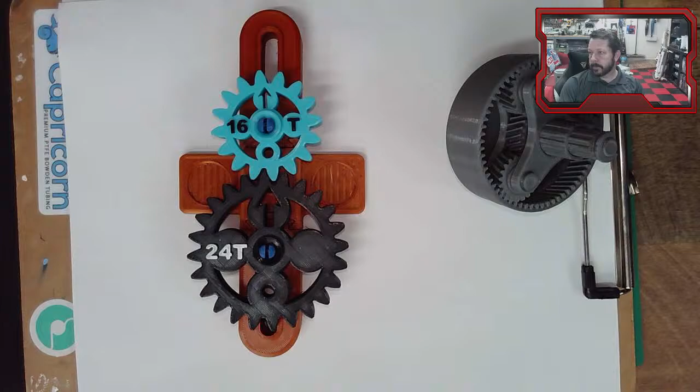All right, I think we are ready. We've got a little bit more on gearing to do. Got some gears here on the screen that we'll look at in a second, just for a minute to describe some things. Let's look at what's left so we have an idea.

We've got today's topic with gear tooth bending stress, but using the Agma method. Last time we did a little introduction to gearing, and we didn't really talk about the gearing failure modes of any sort, so we just talked about the gears in general. Then Wednesday we'll do another Agma.

So Agma, AGMA, that is the American Gear Manufacturers Association. And they have equations that are built on equations that are theoretical, but they've added a lot of factors—temperature factors, velocity factors, and all these overload factors—to try and make them more realistic in the way the gears actually respond to stress. And that's what we're going to do today and Wednesday.

And then on Friday, we'll wrap up, not gears. We'll try and do a few other little topics, mainly friction elements that are in your book. Your book does have a few other things in there. There's a little chapter on kind of a collection of design problems. It goes through a double reduction gearbox design and looks at all the different little pieces that might go in there. So it's interesting. We're not going to go through that one, but it is an interesting kind of comprehensive look at all the machine element components. And then there might be a couple of others.

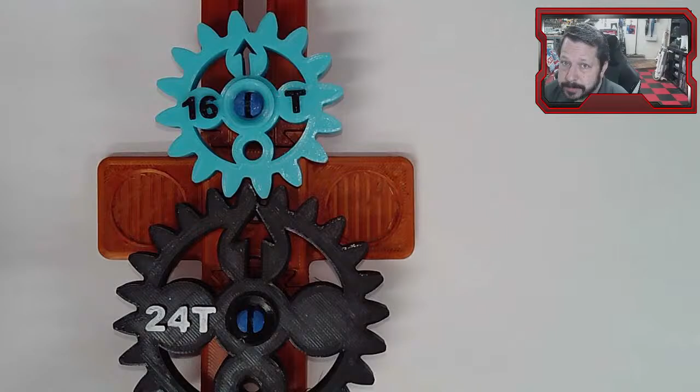So let's get that off the screen, let's look at these guys, if we can zoom in some to them. All right, hopefully we don't need that one. Hopefully you do remember how the gear ratios work. So this one, the blue one, is a 16 tooth and a 24 tooth. So 24 to 16, that ratio is 1.5 to 1. So if I were to turn the larger one, keep it engaged there, one turn, then sure enough, the smaller one has rotated 1.5 turns.

Now the arrows are pointing at each other. And that's one of the main purposes of gears, is that you can achieve these gear ratios. You can achieve similar things with like belts and pulleys. Drums could run against each other. So there are other ways to achieve this ratio. The difference with a gear is that you're pretty much assured that there's no slipping.

The only way that this is going to slip is if the shaft that one of these is on is able to bend enough to where it actually moves out of the way, and then it might just barely engage, and sometimes it slips, sometimes it grabs. But assuming that your gears are well aligned, your teeth don't fail, then you can be pretty sure that you don't have any slipping between the two, the pinion and the gear. So again, in this case, the pinion, we would talk about the smaller gear being the pinion and the larger one being the gear, just to name them.

There are other types of gears. These would be spur gears. So the tooth shape here is an involute shape, and they are spur, straight cut gears, so they're not at an angle anywhere. Chapter 13 goes through several different gear tooth shapes—we're actually in 14 today—but it goes through different gear tooth shapes and even some of the ways that the shape itself is made, like fabricated.

And so this is kind of your standard spur gear. There's nothing particularly fancy about the shape of the tooth except that it is involute. It is not a triangle, there's that little bit of a curve to it there. This is also involute with a little bit of undercut. So you can kind of see these teeth do mate together.

This one being so much smaller, you can see how the tooth profile is a little different. Down in the base, there's this cutout part—that's the undercut. These don't need that undercut because the diameter of the gear is larger.

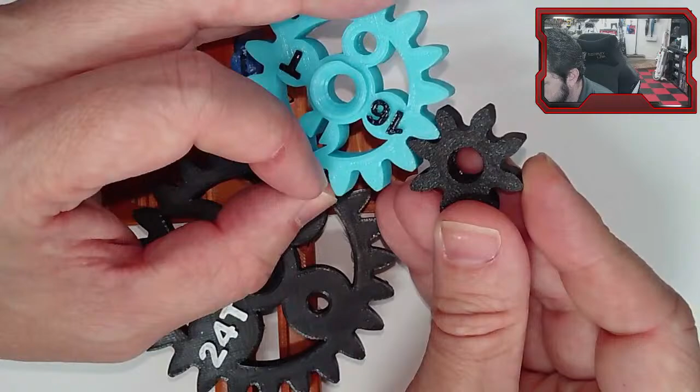But once you get to a certain size, smaller and smaller, you're going to get more undercut so the teeth can actually have a place to be. You can see the blue tooth goes down into that undercut area. Otherwise, there's no clearance for the point of the tooth when they're moving around.

So that's just some of the things we have to worry about. What we're going to calculate today is the bending stress.

As the teeth are turning past one another, there are two forces: one is a tangential force, and one is a radial force. I'm looking at the blue gear, but they both have these forces on them. The tangential force is the one that, as the tooth on the black gear interacts with the tooth on the blue gear, it's pushing past there. That tangential force is the one creating the torque over here.

And the pressure angle—remember we discussed there were three common pressure angles today: 14.5 degrees, 20 degrees, and 25 degrees. That determines the shape of these gear teeth, but it also means the tangential force and the radial force are components, like X and Y components, of that pressure angle.

So with the pressure angle being maybe 20 degrees, you would have the tangential component being the horizontal component of that pressure angle, and the radial component being the Y component of that pressure angle.

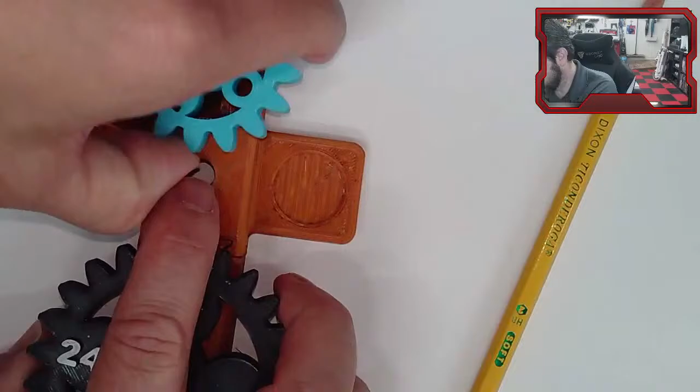Let's take this guy off, and let's see how close we can zoom in to one of these gear teeth. Let's do the ones at the top here with the arrow. I wonder if I can zoom in more. I can—wow, all right, that's as far as I can go.

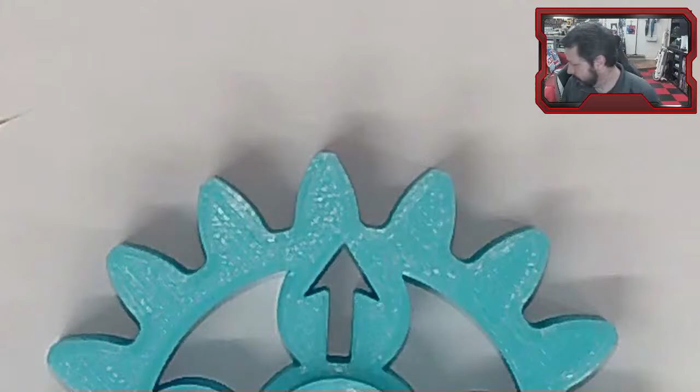All right, so this is the involute profile. What Lewis does—I don't know when the Lewis bending equation was developed, but many years ago—is it treats this tooth like a little tiny cantilever. So instead of having this involute profile shape, it more or less treats it like a rectangle.

So I'm going to try to draw something like this with a rectangle superimposed on it, and then the tangential force—let's use this one. The tangential force from the mating gear, the worst possible place to apply that force would be at the very tip up here, right? Because if I'm thinking of this as a cantilever, the force applied at the very tip would be the worst case scenario for bending stress down at the root of that tooth.

It makes a couple of assumptions. It doesn't even acknowledge the radial force. The radial force pushing this way would actually kind of help make this a stronger gear tooth, right? Because it's going to counteract some of the bending down here at the root of that tooth.

But Lewis ignores the radial component—it only looks at the tangential—and it really only assumes there's one gear tooth in contact at a time. It is possible, like maybe right here, that this guy and some of this one are in contact at the same time. So you can have more than one tooth in contact between a pair of gears.

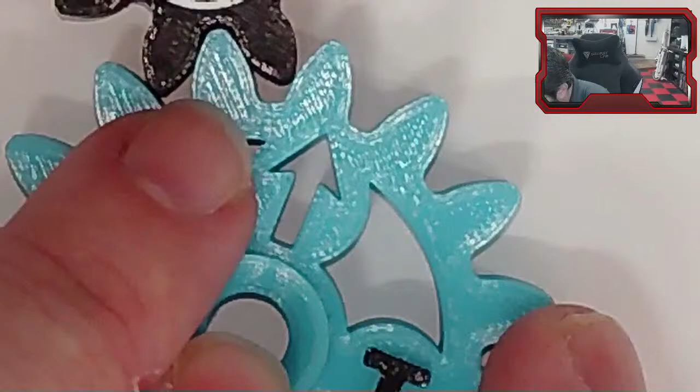All right, let's zoom back out, and put together something like what we're talking about.

So there's our tooth, and the worst case scenario is your book uses a W with a superscript T, I don't remember if it uses a lowercase t. I think it does. Yeah, there it is. That's the tangential force from the mating gear, and it uses that at the tip of this thing.

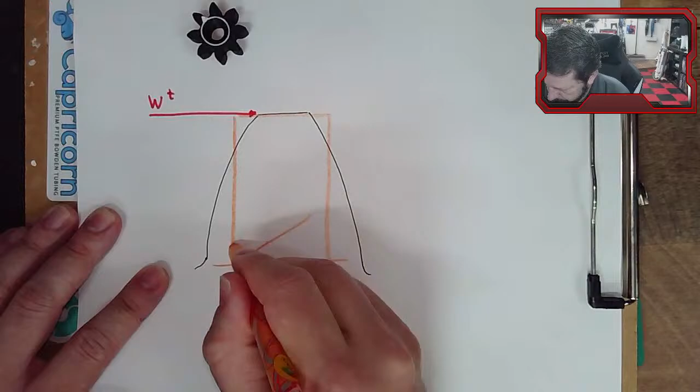Treats this more or less as a cantilevered beam here, something like that. And then it applies - now it might look more familiar if I turn it this way - I've got a cantilever beam with a point load on the end of it.

And that's what it does. It goes in and it basically solves sigma equals m times c over I. So that's a bending equation for a cantilever, or well, for a beam. Doesn't have to necessarily be a cantilever beam, but bending for a beam.

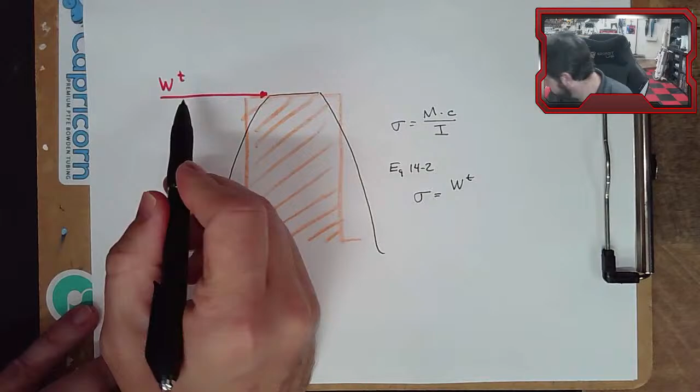And it doesn't use any of these variables. So the actual Lewis equation is, let me get it out of the book, equation 14.2. And it is sigma equals, and then it has WT, so that's the force, and then there is a P over a F and a capital Y.

So we have to go through what these actually mean. So WT is the tangential force, that one's straightforward enough. P, we did talk about that last time, that is the diametral pitch. So let's fill these in.

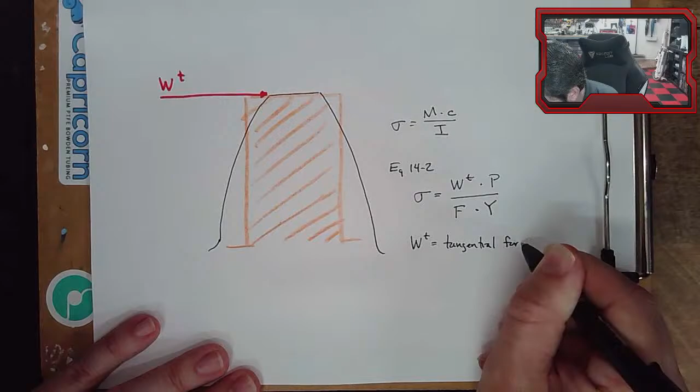WT equals tangential force. P is diametral pitch. So the diametral pitch - that is how many teeth are there per inch of, well, I'm going around this way, that would be circumferential pitch. Diametral pitch would be how many teeth are there per inch of diameter. That's where the diametral part comes in.

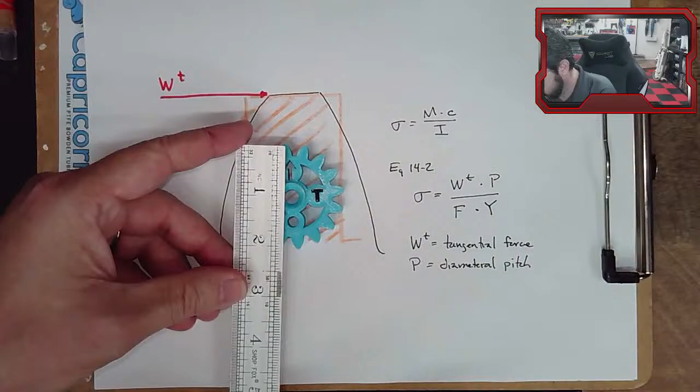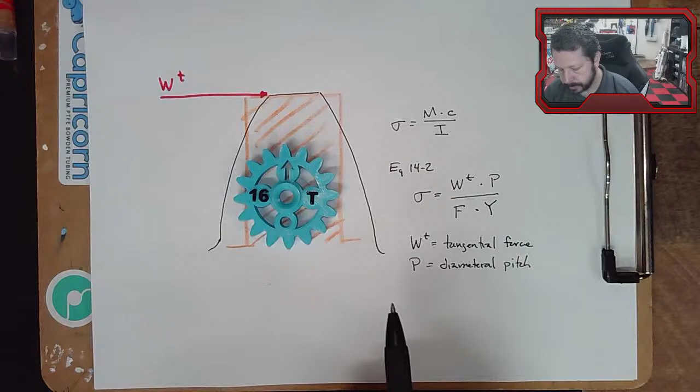So in this case, I don't know what the diametral pitch is, but the diameter of this thing is, I don't have a ruler, something like somewhere around 2 inches. I don't know exactly - the diametral pitch is not to the tip, it's kind of that contact point for the pressure angle. It's somewhere around 2 inches of diameter, and then we've got 16 teeth. So I have 16 teeth per 2 inches of diameter, so I'd have 8 teeth per 1 inch of diameter. So in this particular gear, I'd have roughly an 8 for diametral pitch.

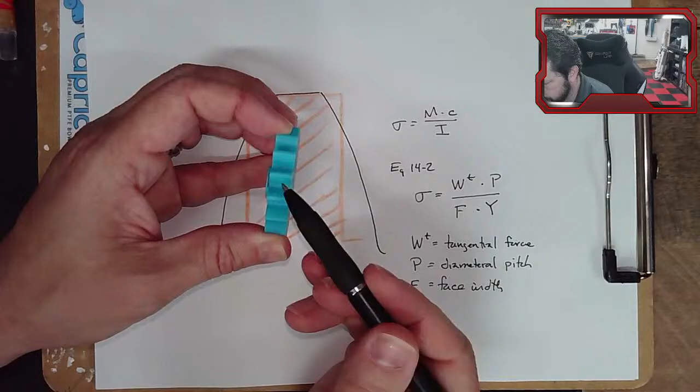F is face width. So that's how much face do I have here that is making contact? If this was a really narrow gear, then obviously the teeth are going to be narrow, and they would be more susceptible to a bending stress failure. And if they're really wide, I've got a really wide tooth over here, then that's going to create less bending stress. And this face width is in the denominator of this equation.

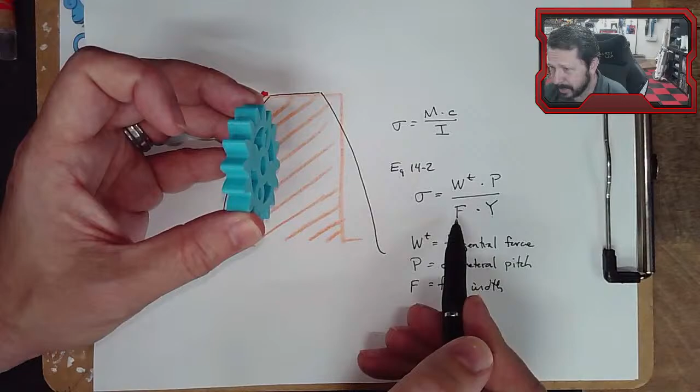Y is something totally different. Y basically takes on the role of C and I in my original bending stress equation - I guess the face width does also. But this is the Lewis form factor.

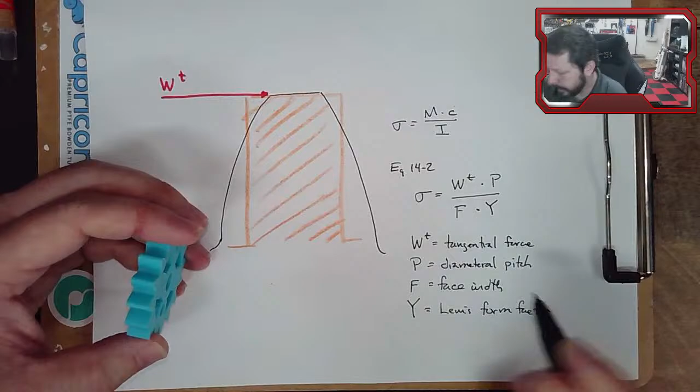And it is - let's see if I can get a chart up here. I opened one up earlier, let's find it again. There? Yeah, so there's a chart in your book. It didn't give me the table 14.2 down at the bottom. And this number of teeth is the Lewis form factor. So if this was a 16-tooth gear, then the Lewis form factor would just be this number, 0.296.

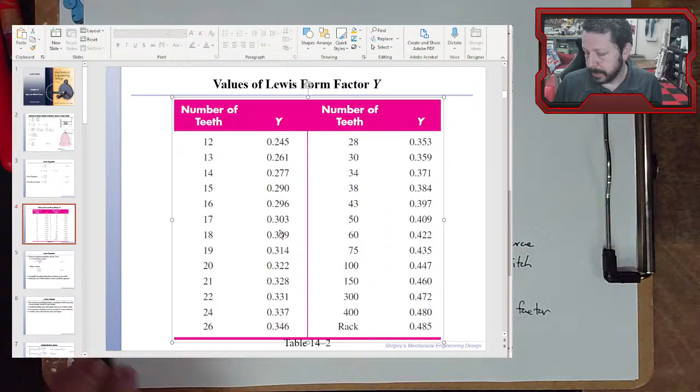There is an equation for Lewis form factor, but there's also this chart. Equation 14.3, I think, is the equation for the Lewis form factor. So what we could do, why don't we go into MathCAD and set up, not these gears, but another set of gears, and run through how we would calculate the bending stress from a Lewis bending stress point of view. So let's get MathCAD open.

Let's see, let's move that out of the way. And I think MathCAD is hiding back here somewhere. There it is. All right, dogs are barking as usual.

Here are our pinion and our gear. They're a little bit fuzzy, but all we need is the picture of them. You might be able to see this little red line on here, that's the pitch line. You might also be able to see these dots, but those aren't really important for anything.

There are labels on here. So the blue gear has 30 teeth, and the gray pinion has 12 teeth. They have a diametral pitch of 6, and a 20-degree pressure angle.

So we'll plug those things in as we need them. Let's put in our equation, the Lewis equation that we're trying to solve. Now your book also adds another kind of modifier to Lewis, which is a velocity factor.

So the faster these gears are spinning, the more load they have to endure, and so there is this velocity factor that can be added. We're not going to add that part to this.

Sigma, this is going to be the bending stress at the root of the gear tooth. Here we're just going to define it.

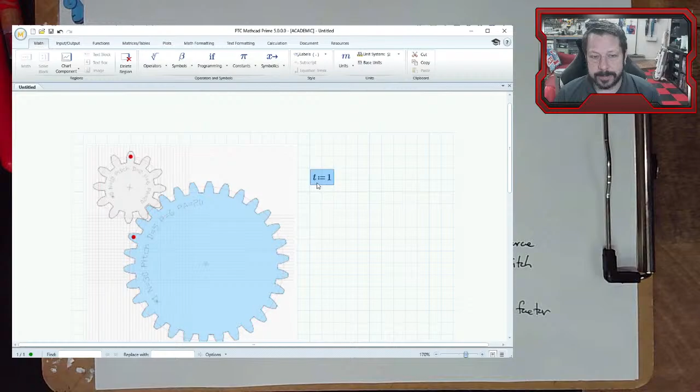W, now I'm having to trick MathCAD, so I've got this T equals 1. That is because the variable that your book uses for that tangential force - I don't even know if you picked up on it, but when I was writing it, the T was actually a superscript, but it's not an exponent, it's just a superscript. So I'm just saying WT, but T is just 1.

So that's how I'm getting MathCAD to agree with me here, that that's not... well, it does think it's an exponent, it's just an exponent of 1. But it's just a superscript in your text. It doesn't mean anything, it's just tangential.

All right, so we have to come up with these values. So the diametral pitch is just written on the gears here, P equals 6, so we can get that one. We'll do the same thing where it's teeth per inch, but teeth aren't actual units, so we'll just make MathCAD think that it's just a 1.

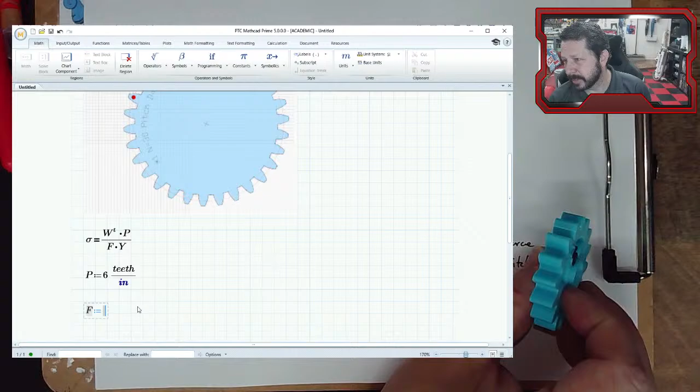Let's see, face width, we can define that. So remember, the face width is how wide are the teeth on the gear. So you might have a hub, kind of see this little area over here that sticks out - that's not the face width. The face width is how wide are the teeth. So I'm going to make these a half inch wide.

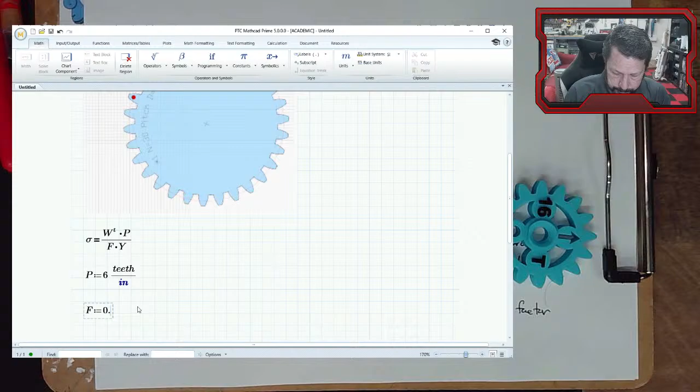So that would just be something you measure, or you know, or you're given, or maybe that's the thing you're solving for. That's one of the easier variables to modify if you come out with a gear that is the right shape - it has the right gear ratios with the gears that it mates with, but it's not strong enough.

This face width is the easiest thing to modify. Just make it thicker - instead of trying to put more teeth in there or run at a different speed or whatever, just make the gear teeth wider, and that will reduce the stress on the tooth. So this is one of your main design variables, and for us, we're just setting it at half an inch.

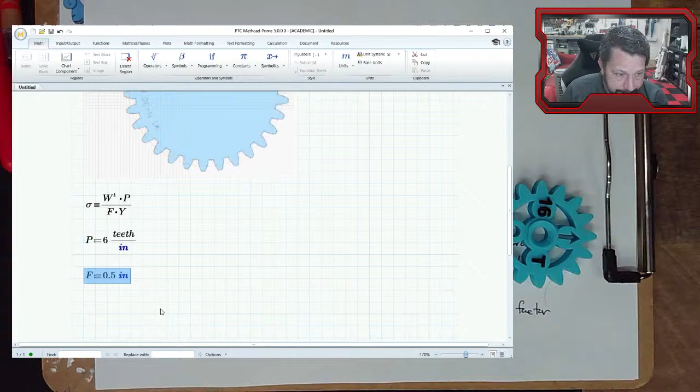Y, that's an easy enough one - that's the Lewis form factor. Now, we do have to decide, are we talking about the pinion or the gear? Most of the time, you're going to be dealing with the pinion, but you could easily also operate on the gear.

Well, let's look at the Lewis form factor for a reason why. So these have teeth of 12 and 30. So that's not it - where'd it go? Oh, I pulled it out of the way. Yeah, it's over here.

12 has a form factor of 0.245. This number is in the denominator of the bending stress equation. So 0.245, the other one was, I think, 30: 0.359. So the larger number of teeth will put a larger number in the denominator of the stress equation, so it will lower the stress. There'll be a lower bending stress on the gear tooth with more teeth on it.

So you're going to be working it with the pinion, the smaller gear. So we're going to put 0.245, just reading it off of here, as our form factor. Actually, let's leave that, we'll keep coming back to that. So let's leave that more or less there. All right, so y equals 0.245 from the table.

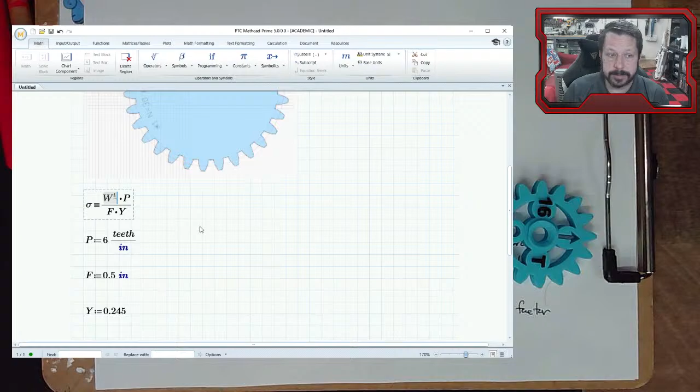So we need the tangential force. I'm going to get this one a different way. We've done this in a couple of different places, maybe even in the shaft lectures, and we've talked about this pressure angle. You just take the horizontal component to get the tangential force. I do have the pressure angle, it's 20 degrees. But we're going to get this one from a different route this time.

So let's figure out how much power we're dealing with, and from that, let's figure out what the tangential force was going to be. That's a little bit different than the way we've done it before, so it's just a different process. So I've got to set up some more given situations.

So let's say the torque on the gear - the gear is the blue one - and I'm going to define this as 125 foot-pounds. So it's given. Let's also say that the omega for the pinion, oops, I didn't get the subscript in there, did I? This is the speed of the pinion, 100 RPM. So those are just given values that we are designing for or that we've set up already.

And now, for the pressure angle, I meant to find out what variable gives me the symbol for pressure angle, and I don't know what it is. I could just go through all of these until I find... oh, that's going to be pi. Oh my goodness, which one? Oh, it's J. All right, or that's going to be closest that I have to what I need. So that's the pressure angle, 20 degrees.

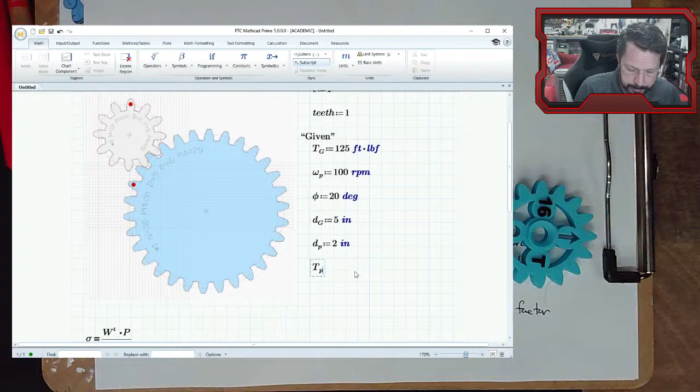Let's calculate the torque on the pinion. So this should be a pretty basic calculation, just using either the diameters, so 5 to 2, or using the number of teeth. I didn't actually put the number of teeth in here, but we could also put those. They are also given. I'm not going to use them, but just for completeness, we can have them in here. So there are 30. We do have our teeth variable set up, so we can put teeth in there.

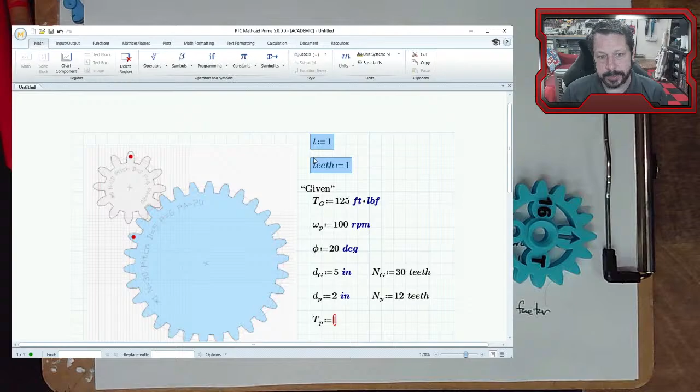And pinion is 12. Remember, you can't use teeth as a unit unless you do something like this earlier where you just set it equal to 1. All right, torque on the pinion is the ratio of the diameter of the pinion to the diameter of the gear times the torque of the gear. And it came out in joules, so let's put it in foot-pounds since that's what our other stuff is in. 50. And, you know, we could have sorted this out ourselves just with algebra.

We could also do a similar thing with the speed. Omega of the gear, we have omega of the pinion. So omega of the gear would equal the diameter of the pinion over the diameter of the gear times the omega of the pinion. Oh, I just typed W, I didn't do the... there we go. I don't like the way the subscripts work in this version of MathCAD. Let's put it in RPM though.

40 RPM. So now we can calculate the power of either of these. They'd be the same number. But if you remember, in general, power equals torque.

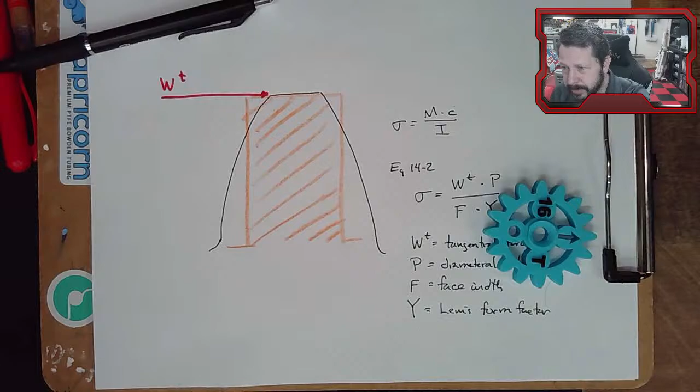We're going to put that tangential force at the very peak of the gear tooth and calculate the bending stress using the Lewis equation. So let's actually just copy this equation, paste it, change that to an evaluation, or well, a definition, and then evaluate it.

Get some weird units here. Let's see if we can get KSI out of this, without that. Why is it? Oh, because I've got the WT part in there. Let's change this to be the superscript T. Get rid of that. There we go.

5 KSI. Now this could be modified more, like I said, with the velocity factor - there's a KV that can bump this up based on how fast we're spinning the gears, and a couple other factors like what shape the gears and gear teeth are. But still, it's not going to multiply multiple times, it's going to be a factor of 1 point something. So you could be pretty sure that 5 KSI for most any kind of metal you're going to make a gear from is plenty of factor of safety against bending stress.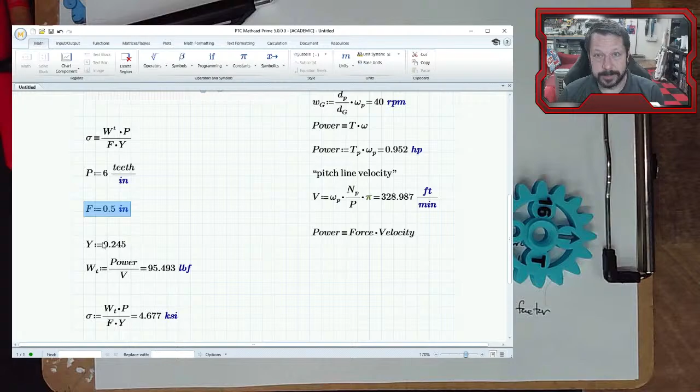So Lewis doesn't give you an accurate number, but it does give you a 'are you close' number. For instance, if this number had come out to be 46.7 KSI, now you're getting a little bit close to yielding stress numbers, and given that this Lewis equation isn't particularly accurate, you'd have to wonder. If it came out to 467 KSI, then you know there's no way you're going to get that kind of strength out of a metal gear. So I would know I have to redesign something, and usually that means redesigning the face width - it's the simplest one. But 4.6, you're pretty sure that's not going to fail any kind of metal gear.

But if you want to know more accurately, that's when you go to AGMA. I think we certainly have time to start AGMA. We may not get all the way through it, it's a pretty lengthy process, but let's go over to AGMA.

AGMA, again, is the American Gear Manufacturers Association. Wow, I misspelled that. There we go. So it's AGMA.

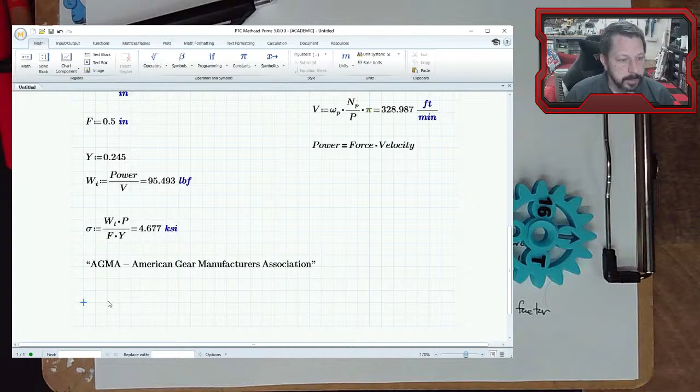And what AGMA does is it takes this equation, basically, and adds a lot of multipliers. It's similar to when you do the modified endurance limit - you take a base number and then modify that number based on all these conditions that might occur. AGMA does the same type of thing. It's going to give us a stress number, like this one, but it's a totally different number, and it's not an actual stress that you could compare to a strength you would look up in a book.

So what you do is you calculate the AGMA bending stress and you compare it to the AGMA bending strength. So you actually have to calculate AGMA two times for the bending failure. Once to calculate the stress, and then again to calculate the strength for that gear.

There's a whole other type of failure that AGMA looks at that we haven't talked about yet. We'll do that on Wednesday, but the contact point between the gear teeth cycles over and over, so there's a contact stress that has to be calculated. It works the same way, where you calculate the AGMA contact stress and compare it to the AGMA contact strength. We're definitely not going to get to that today.

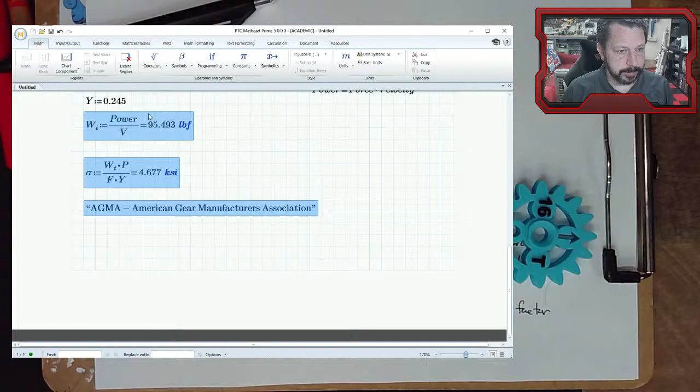But we should be able to get through the AGMA bending stress. All right, let's get our equation written down. Let's start a new page. In fact, let's get this guy on another page too. All right, let's start down here.

So AGMA, now your book just uses sigma, but I'm going to put a subscript AGMA on it, if I can type a subscript AGMA. There we go. Just because it's not a sigma stress that you've been using, it really is specific to AGMA.

All right, so W, again I will use the superscript here, but only because I'm in the symbolic equation. So there's the tangential force. That number we already have. That's the exact same number we just used here. So that's the same.

WT times KO, that's going to be an overload factor that we can look up. KV...

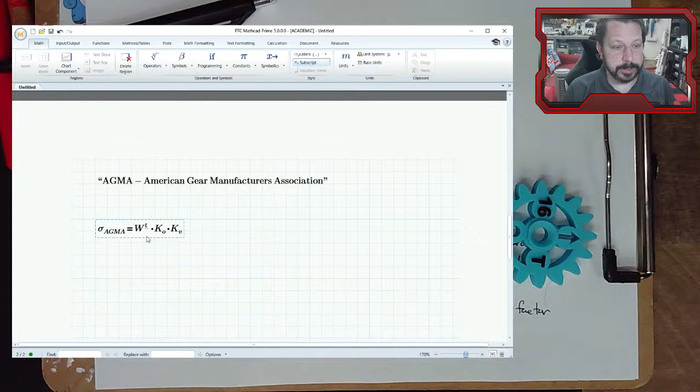...is a dynamic factor. Now this KV, a similar one does exist for Lewis, so that part of Lewis can be modified to make this number a little more accurate by multiplying by KV. That's talking about how fast the gears are spinning and how well they're made. The quality of them would affect that.

KS, this one is a size factor sort of thing. It's optional. The way AGMA is set up, it kind of future proofs itself so that they know there's an effect, they just haven't sorted out the exact numbers to put for that effect. So some of these are going to be optional, and we're just going to fill in a 1 because we don't know.

Now, I've got the 10th edition of this book, which was printed several years ago, and I didn't go check the current AGMA setup. If you go to the American Gear Manufacturers Association, you will find the most recent data on some of these factors. So there could be more guidance currently, depending on when you're trying to solve this AGMA equation, and you would need to go directly to the American Gear Manufacturers Association to get those numbers and those charts.

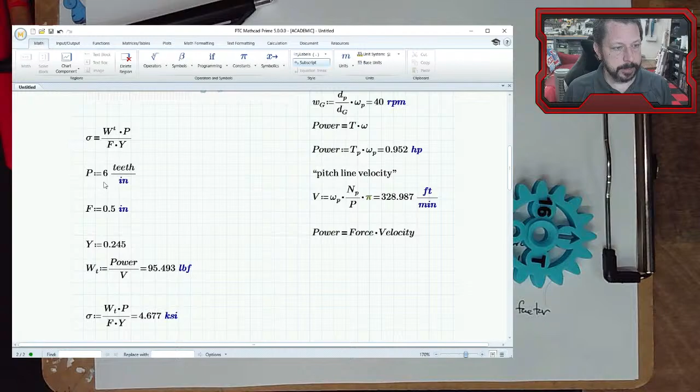Multiply times P. Now they use a P sub D. We just use P up here. It's the same thing, that is the diametral pitch. They just specify that it is diametral with the subscript D.

That number is over F, which is the face width. We have that already, we used 1/2 inch. Km, Km is a load distribution factor. It's actually going to take us a long time to calculate that one. We'll get to it in a minute.

KB, not KB like we used with the springs, the Bergstrasser. It's a different KB. What is it called? It is the rim thickness factor. So that's a relatively easy one to deal with. We'll deal with it in a minute, at the end anyway.

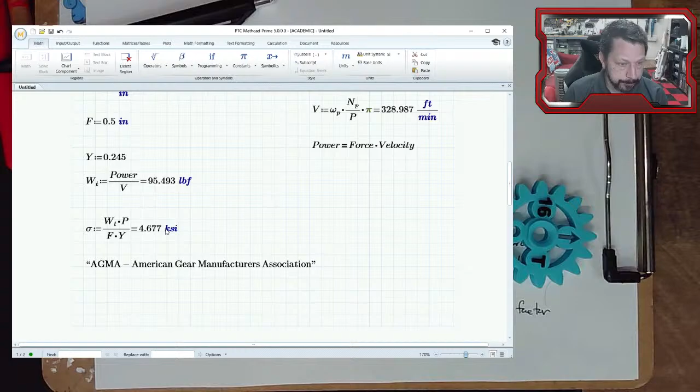Over J, J is similar. It is a geometry form factor, so it's similar to the Lewis form factor. It's not the same number at all, but it's kind of the same thing. All right, so some of these we have, the others we need to go and figure out.

All right, so first of all, K overload. Let's see if I can find the little chart for overload. Well, we can go through some of these equations while we are looking. There's that KV applied to the Lewis form factor.

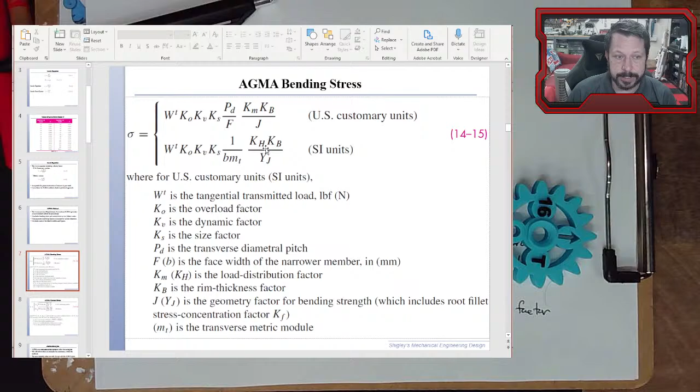There's the AGMA bending stress. Now, notice I am using US units. They do have a separate equation if you're using SI units, and you'll notice that some of these variables are slightly different. Like instead of J, they have Y sub J, so that when you grab the number out of a chart or a graph, it has the right units in it. So if you are using SI units, then you need to be over in this version of the equation versus the US unit version.

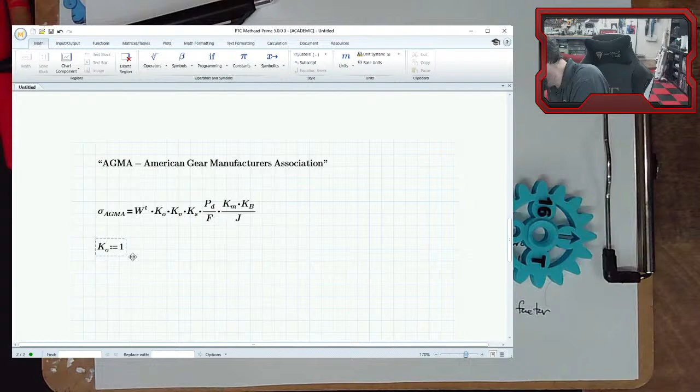Yeah, so here's what your book... I don't know how you're supposed to know these numbers otherwise, though. Oh, see, figure 14.7. Okay, that's the elastic coefficient. Yeah, I don't see, that doesn't actually help me.

But it is on page 750 that it mentions the overload factor, and it gives a reference for where you can go look up numbers like I showed you on the screen. But since we don't have any indication that this has an overload situation, heavy shock or medium shock, we're going to go with K naught equal to 1.

KV is the next one. So now we've got WT, we've got overload, let's do the dynamic factor. Maybe we can label these so that we don't forget. This next one will be the dynamic factor.

All right, so dynamic factor is KV. It is not quite as simple. Let's go find it in our chart here. Here it is, there are two equations again. There's that feet per minute that we had as oddball units before for the velocity. That's because in this equation, V is expected to be in feet per minute. If you're using the SI version, it has two different versions, velocity is in meters per second.

So how this one works is you have these A and B parameters, where B is based on QV. QV is a quality value. Also, there is a chart where you can just look up the dynamic factor off a chart with different traces on it. We're going to use the equation though.

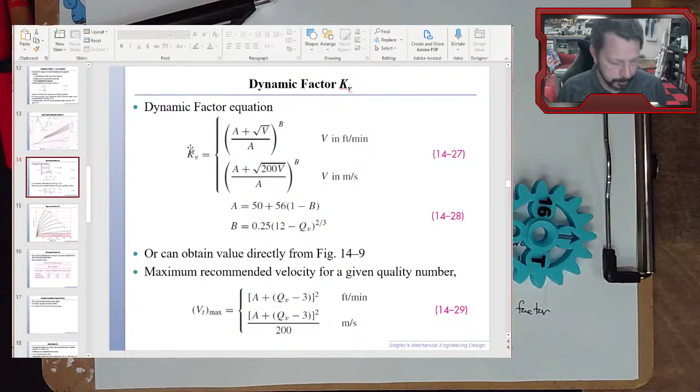So the first one is actually QV, which is 5 for us, and we just decided that's the lowest quality rating we could pick. All right, B, based on that, is 0.25 times 12 minus your QV, and that 12 minus QV term is raised to the 2/3 power.

That gives us a value for B of 0.915. You use that value to calculate A, 50 plus 56 times 1 minus B. That gives us... that doesn't give us that. Oh yeah, it does, 54.77. All right, now I take A and B, plug them into the correct version of KV.

Let's see if we can get this one right. It's going to give me an error, but we'll fix it in a minute. Plus the square root of V, which has to be in feet per minute, over A, all of that raised to the B. Now it's going to give me an error that says it can't be calculated.

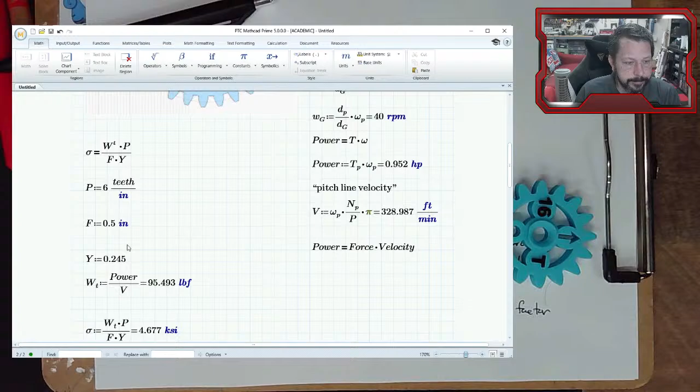That's because this is a MathCAD thing. The V is feet per minute somewhere, or it's a velocity, so it has units of velocity. A and B do not have units at all, so it can't add a unitless thing to something that has units. So I'm going to divide by feet per minute here instead of something like inches per second, because that's the unit this equation expects velocity to be in.

So now it'll solve it, and I get 1.3 for kV. So we have our dynamic factor. Ks, this one is the size factor, and it's optional, and we are just going to put 1.

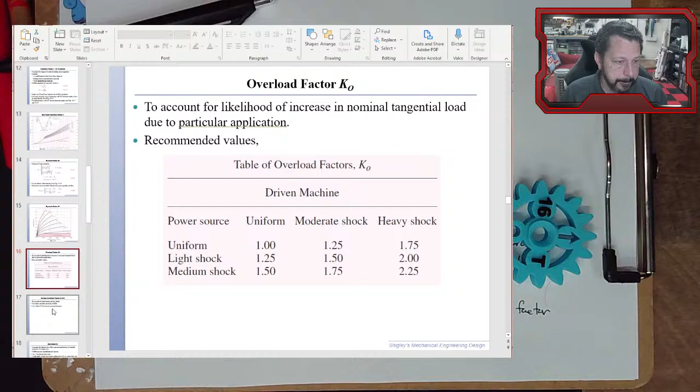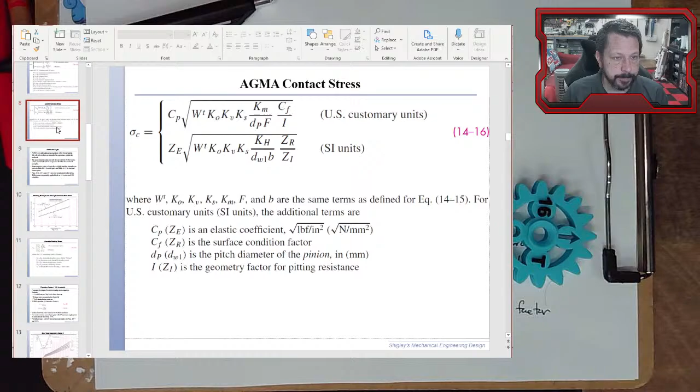Let's see if I have a chart pulled up about Ks. I don't even think I do. Surface, KV, J... yeah, I don't have one for Ks pulled up. So it is an optional size factor, one of the ones that's kind of future-proofing the equation. Once there's more data, there would be a better way to calculate or put a number in for the size factor. This is trying to take into account fatigue, kind of like the size factor for a shaft, where if there's more material, there's more chance of an error in the material. But there's no data currently, at least in the 10th edition book, to put a different number in here. So we're going to put 1.

Now we got that one. We already have our... we don't have a PD variable, so let's do that. It is just what we called P, the diametral pitch. So we took care of that. We already have a face width.

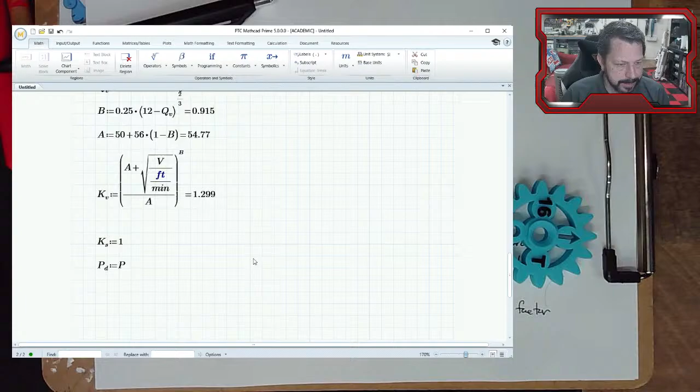So Km, this one's actually a lengthy one. Let's do it. Let's see if I have a picture of that. Hey, there was a Ks. So there is an equation you can use for Ks, where you're basically taking the method from chapter 6, finding the KB and doing the reciprocal of it. So you could apparently use that process, but we're just going to stick with 1.

Load distribution factor, I'm looking for it, here it is. So Km is all of this. To calculate Km, I need all of these other little pieces over here. First, let's put our Km equation in MathCAD symbolically: Km equals 1 plus CMC times CPF times CPM plus CMA times CE.

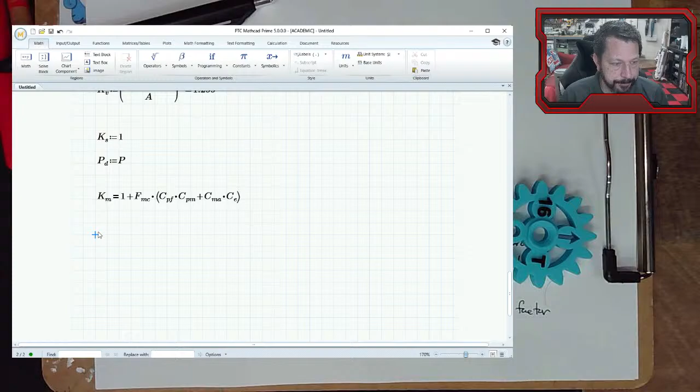All right, so we got to get all of these things sorted out. So let's go back over to this. So CMC, the first one of these, we have two options, 1 or 0.8, and it's talking about crowned versus uncrowned teeth.

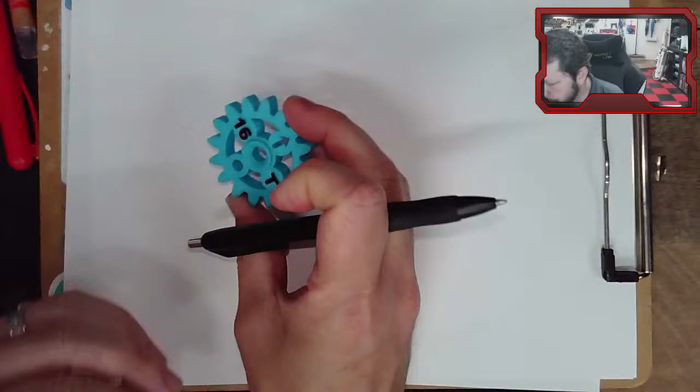What this means is, we'll have to draw a picture. So we have uncrowned teeth. Let's get a blank page. If we had a gear tooth here, I'm going to draw the gear teeth as a rectangle just to make the crowned part easier to draw. So there's our gear tooth, kind of like that rectangle, and it has some face width into the page. There's a fillet down here. So that's uncrowned.

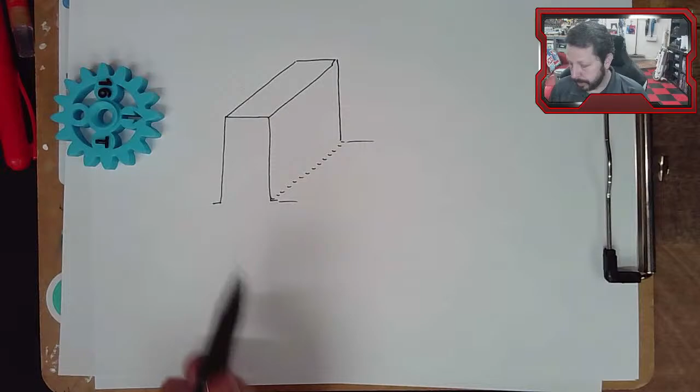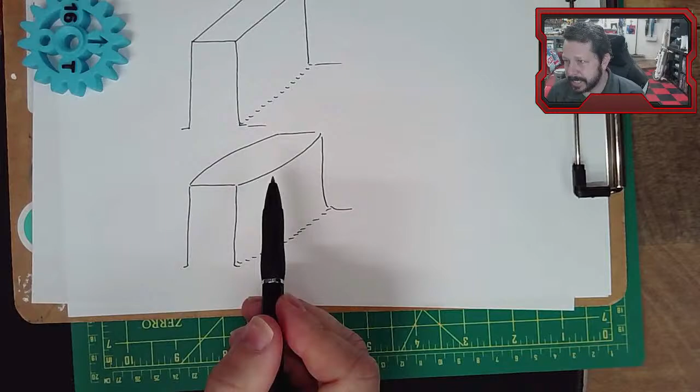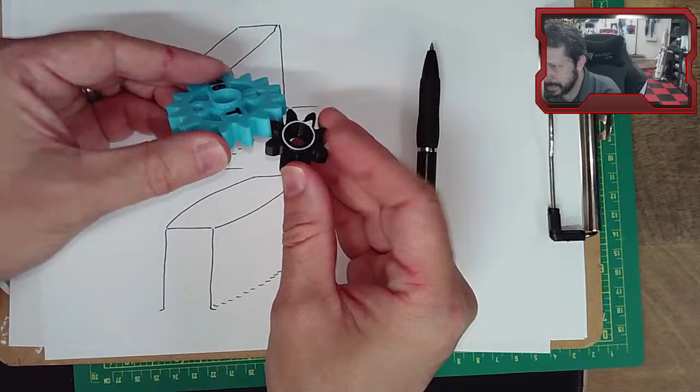So crowned is like this. Hopefully you can see I didn't just accidentally draw this line curved—that's the crown. The idea is that instead of a perfectly flat surface on the face for the gear or pinion to mate with, I have a little bit of a crown so that if I'm a little bit crooked on mating these things, I still have good contact between the two gear teeth. So I can have a little bit of misalignment, not as much as I'm showing here, I'm just exaggerating it. Not as much as this twisting, but you can have some of that twisting and still get good contact.

Where if these were perfectly flat and I twist them, there's going to be a single point of contact. So crowned gears have a better ability to handle misalignment, but they're harder to make because now each of these teeth has to be crowned, so somehow you have to get that crown made on the surface of the tooth. You can't just broach across it to create the teeth. So that's crowned versus this, which is uncrowned.

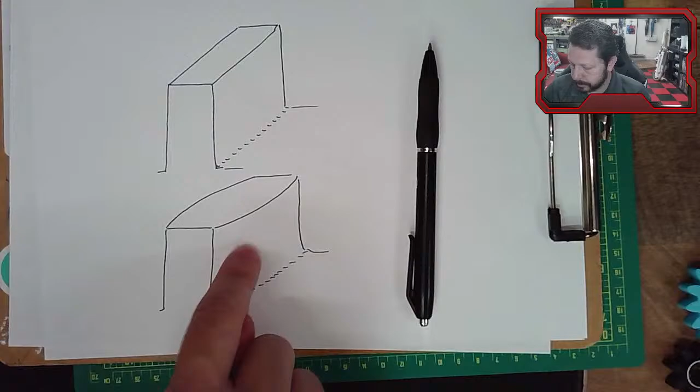Since we have the quality 5 gears, I'm going to assume that we have uncrowned teeth, because you wouldn't go and crown the really cheap gears. So that gives us a CMC of 1.

The next one is PF - I don't actually know what the subscripts stand for, whether MC stands for crowned or uncrowned. So PF is the next one in our list. We have our face width, which we have built in, and D, which is the diameter of the pinion or the gear. We're talking about the pinion in our case, so it'll be D sub P, the diameter of the pinion. Our face width is less than 1 inch, so we need this first equation.

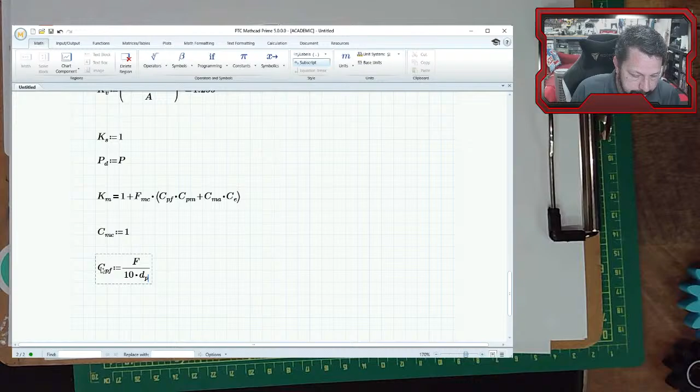So CPF is F, face width, over 10 times the diameter of the pinion, that quantity minus 0.025. Now we essentially get 0 - some number times 10 to the negative 18th, so we pretty much get 0. If we put a 0 in here, this whole thing just becomes 1. Well, no, because this part becomes 0 plus whatever that is, so who knows.

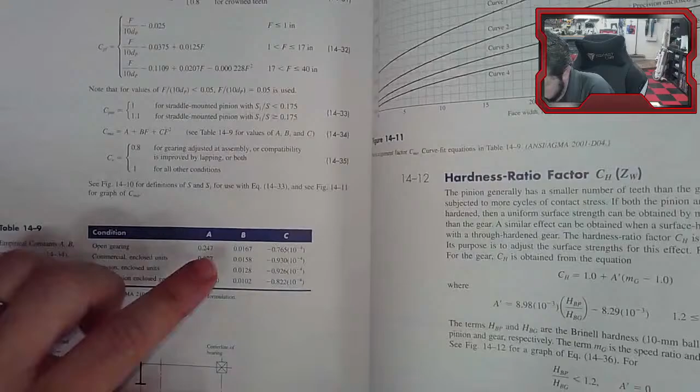But it does give us a note - in your book it's given, in this chart I have it doesn't actually give it, but let's find it. Here's the equation we're using, and down here it says note that for values of F over D, diameter of the pinion, less than 0.05, just make that whole term 0.05. So we're going to do that.

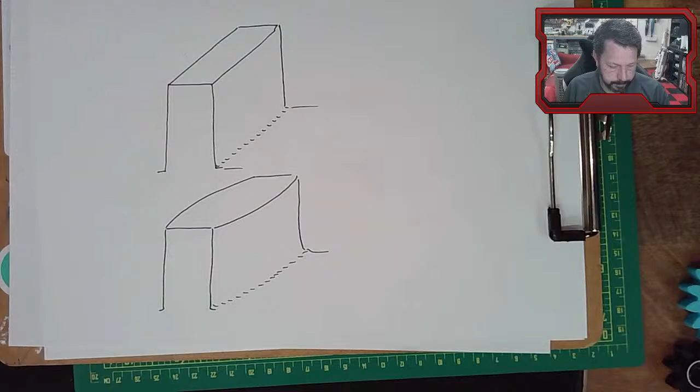So let's copy this thing, and let's make this term here 0.05. And now we get 0.025 for PF.

All right, PM - well, I don't have a picture for PM. There it is, it's on the next page. So this is how the gear is mounted onto a shaft and the shaft supported. I've got this picture here. Many times with gears, not 100% of the time but most of the time, the gear is mounted between two bearings somewhere, and PM is whether it's straddle mounted, and on which side of the center it is.

So this is the center line of the gear - there's one bearing, there's the other bearing, the shaft is through the middle, there's the center. For a straddle mounted pinion, which we're dealing with, S1 over S - S1 is the offset of mount and S is the total span - less than 0.175 gives us 1, and 1.1 if this ratio is basically how far off center it is. So if it's close to center, we use 1. If the gear is kind of off to one side of the center of this span between the two supporting bearings, then we use 1.1.

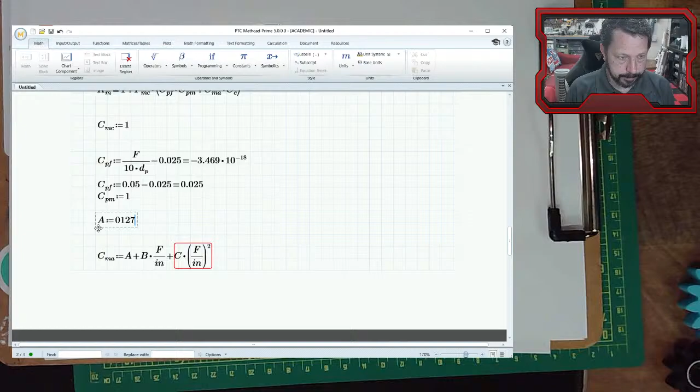Let's see if we can put them in right here. A from our chart is 0.127. B is 0.0158. And C is negative 0.930 times 10 to the negative 4th. And now we have a CMA number, 0.135. I think we're almost done.

We need CE. Yeah, I saw it in here. There it is. So we can either have 0.8 for gearing that's adjusted at assembly - basically, how well aligned are your pinion and gear - or 1 for all other conditions. 0.8 if you've done a lot of careful alignment. We have not done careful alignment with our gear setup, so we're just going to do 1.

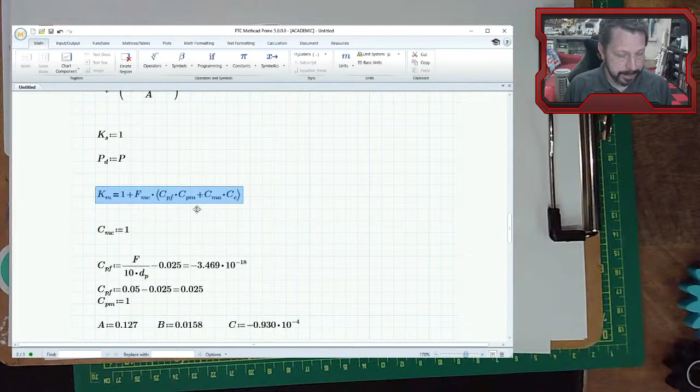So for that one we can just go down here and CE equals 1. We have all of these now, and we can set this equal.

Oh, I don't have FMC. But let me check, let me make sure. Oh, because I typed it wrong - that should be CMC. I didn't know what that variable was, I'm messing up my whole equation. It's 1 plus CMC. There we go, and it comes out to 1.16.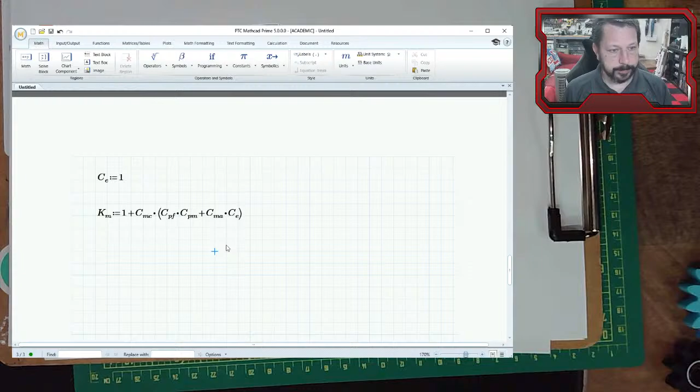All of that to get this extra 16% in there. Alright, now, do we have them all? No, we don't have KB or J. We have time to get those, though.

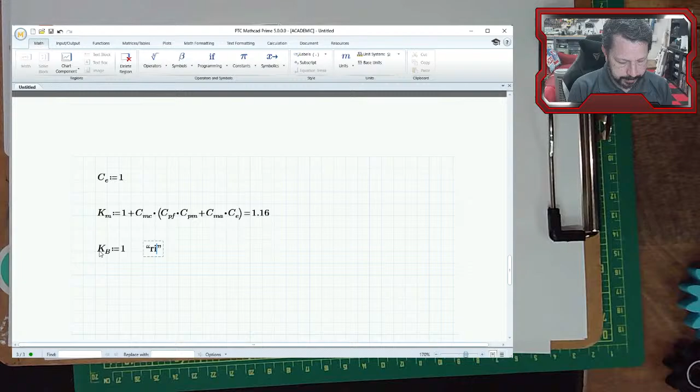So KB is going to be 1, so I'll go ahead and put it in. This is the rim thickness. Let's see if we can find it - here it is, way over here. So the rim thickness - first your gear has to have, you have to know if it has a rim or if it's a solid gear. The ones that I've been using, these do have a rim.

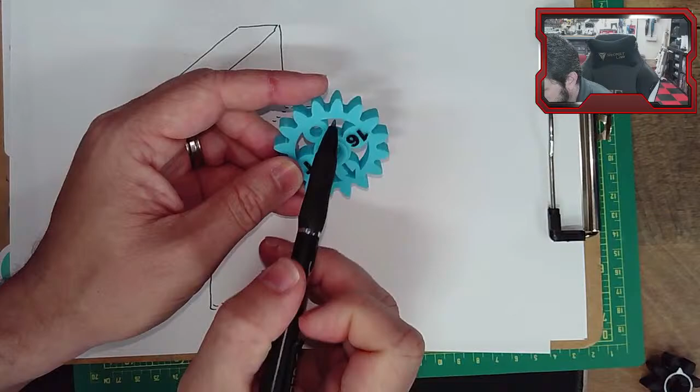They have a weird set of spokes inside here, but it's not solid. It's not a solid filled-in blank like you just took a flat sheet of metal and cut the gear teeth into it. So this one does have a rim, and you can see the rim is right here. So if this rim thickness is different - there's holes in here, there's spokes in here, or maybe it's just inset and not as thick, solid but thinner in this area and thicker out here - that means it has a rim.

And then you go figure out what this rim thickness ratio is with this equation. Our gears are not this style - we're just using flat gear blanks with teeth on them. So there's no hub really, no spokes, no inset center part, nothing like that. So we just use the value of 1.

But they have a chart and an equation. When this ratio of rim to thickness is less than 1.2, then you could have some factor here that gives you a larger rim thickness ratio. We're just going to use 1 in our case. And then that leaves us with our geometry factor.

So that one is - no, that's Y. Where's the picture for it? It's way up here, actually - spur gear geometry factor. Alright, so this is a chart for spur gears. I don't think there's an equation - well, there is an equation for converting it, but there's also this chart. In this case, we're going to use the chart. So what you have is on the x-axis, the number of teeth for which geometry factor is desired. Ours is 12 - the pinion had 12 teeth.

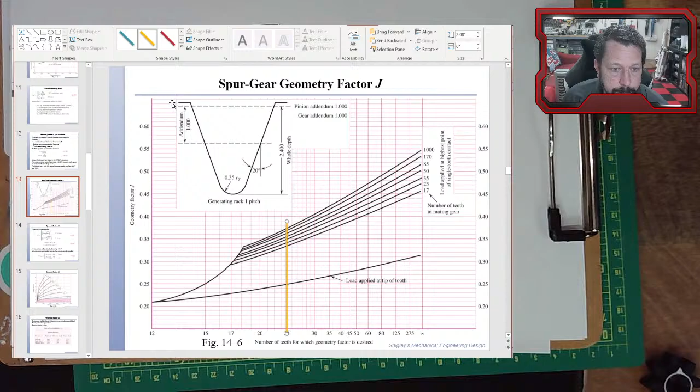So I don't have to do anything other than get this 0.21 number as our J value. But let's just momentarily pretend we have different numbers on our pinion and our gear. Let's say our pinion is 24, so we're on this line right here now. Let's say, in fact, I probably can draw a line there. So there's 24, let's make that a big yellow line. So there's our pinion teeth. And let's say that we have 35 on our gear.

We have two options at that point. We have the option here, down here, where we're taking the most conservative approach where the load is applied at the tip - that's kind of what we did with the Lewis equation. So we could take this option, and it doesn't matter how many teeth are on the gear, just how many are on the pinion, and we get a 0.25 as our geometry factor.

Or we can say, well, a little more realistic and less conservative would be we actually go and find the number of teeth on the gear. Let's say it's 35, and we intersect these lines, which end up right here, which is going to give us a 0.355, I would say, for our geometry factor.

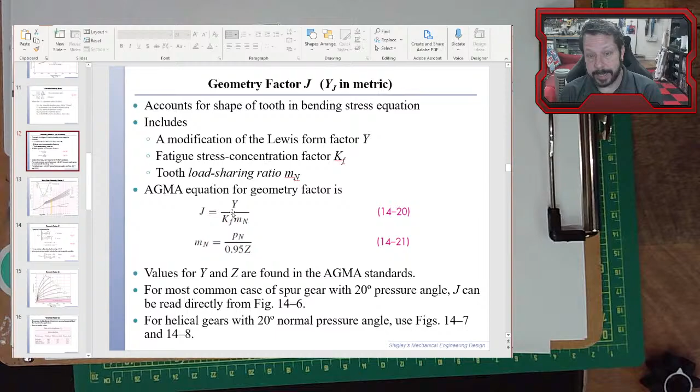So that's how you can use this. Like I said, there is an equation, you can actually calculate it if you want to. But this is simpler because you have the different options of do you want to do the worst case scenario, do you want to break it out to which one of these gear teeth numbers are you dealing with, or whatever. In our case, we're actually over here at 12, so our line is over here, and it just intersects with all the numbers of mating teeth at 0.21. So that's for J, J equals 0.21.

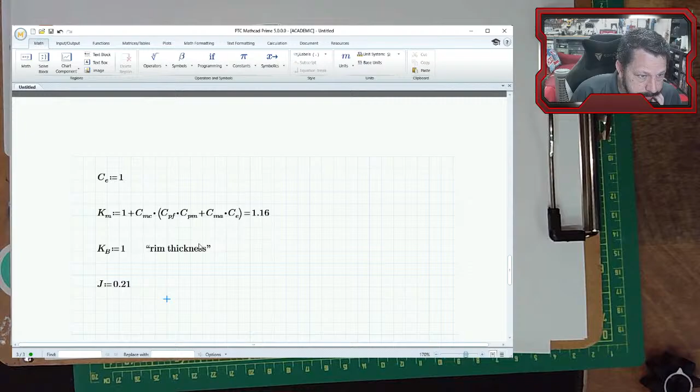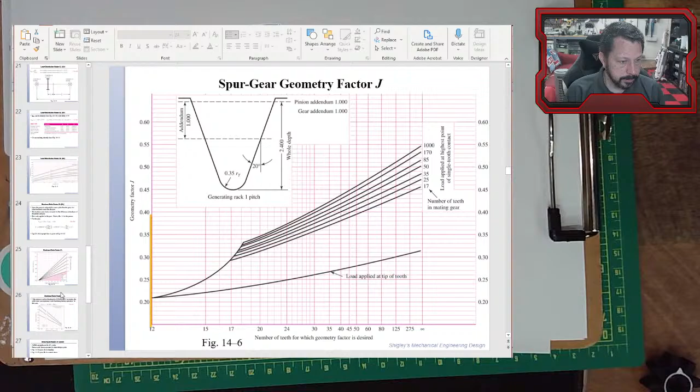8 KSI. The only problem is you can't take that 8 and compare it to just the strength of the metal. You actually have to compare it to the AGMA strength equation, which I'm scrolling through to see if I can find it. Is this it? No, well, that's the safety factor, but I guess we'll use that. Yeah, that's what we'll use.

So we can solve for the safety factor. Now they have these in two different forms here because I have bending strength on one and I have contact strength on the other. So there is a fully corrected AGMA bending strength and a fully corrected AGMA contact strength, and this equation kind of builds those in. And this bending stress that they have listed as sigma, that's the sigma AGMA that we just calculated. So we can use this equation to figure out our factor of safety. So basically this numerator is the AGMA bending strength.

So it's got a couple of terms in it that we don't have values for. SF, we'll go ahead and just do it this way: ST times YN, that's capital N, over KR times KT. Oh, well, yeah, I'm writing it similar to the way they had it written, but they do have it written slightly differently. Sigma AGMA.

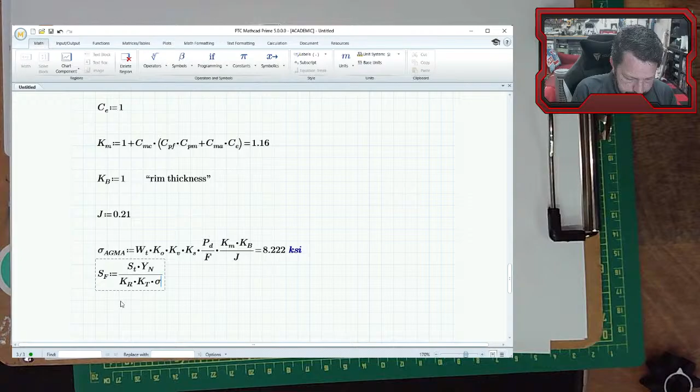All right, so let's start filling in the blanks here, and hopefully we get it done in time. ST, so this is a strength based on the hardness of the material, of the pinion material. Usually the pinion is a harder material than the gear. And if there's even, so this is just an aside here, but the pinion being harder than the gear, if the ratio of those hardness is really great, then the gear can actually undergo work hardening as it's being used.

What we're going to do with this is we have a chart, not that chart, this one - Figure 14.2 - and there you have to be careful because there are about 4 of these charts that look like this one, so you have to make sure you're actually getting the right thing, the right units, and the right materials. So we're just going to go with a grade 1, and we're going to say our hardness is 250, so it's a nice even number here.

So we'll just plug those numbers in. We can't actually get ST just yet, so our hardness is going to be 250. There's an equation, and we're grade 1 instead of grade 2. We could try to read 250, and it's going to give us 32 something. But there's an equation we can actually use to calculate that ST value once we have the hardness.

So ST from the equation is 77.3 times our hardness, plus, and we've got to get some units on here. These units will end up being PSI, and this is plus 12,800 PSI, from the chart. It actually has that unit on there. So I need to put units because I don't have units on either of these other numbers, so we're just going to kind of cheat it.

YN is related to how many cycles. So there's a chart and an equation. Looking for it - this one. So the stress cycle factor, figure 14.14. AGMA is based on 10 to the 7th cycles. Just so that we're different and we can use the chart, let's say that we want to do 10 to the 8th cycles. So 10 to the 8th is over here.

And there are these different material properties, different hardnesses, you know, nitrided, case hardened, different things. And so there are different traces at the lower number of cycles. Over here, everything at the higher number of cycles that we want to design for are kind of lumped together into a range. And the range has a bottom line and a top line, both with an equation.

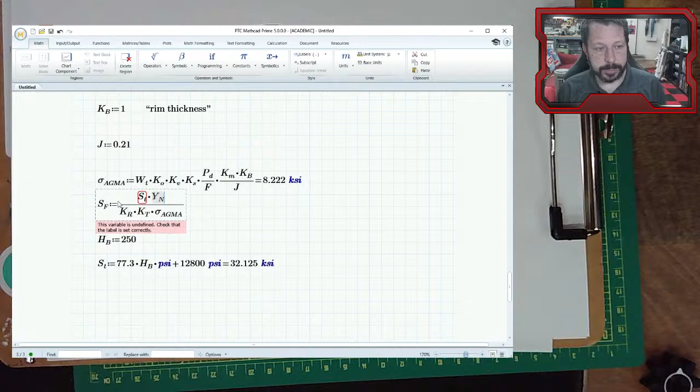The bottom one - so the YN is in the numerator here of a safety factor. So the larger number will give us a larger factor of safety. We're going to take the more conservative approach and put the smaller number so that we get a smaller factor of safety. So since there is a range here, we're going to take the more conservative approach, which means using the one that's going to generate a smaller number for YN. So we're going to take this equation, put in 10 to the 8th for our number of cycles, and calculate this YN value.

Oh, we ran out of time. We're so close... I'm going to go ahead and finish. If y'all have to go, that's okay.

Times... I'm just reading the equation off of the chart here. Cycles, we have to define that, times negative 0.0323. So that's the equation from the chart. We are going to say that we want our cycles to be 10 to the 8th. And that gives us a value for YN of 0.928.

So we have that. Kr, we don't have that - that's our reliability. So there's a little chart for reliability. You know, do you want 90%, 99%, 99.99%? We're going to go with 99% reliability that corresponds to 1. But you can modify this number based on how much reliability you need.

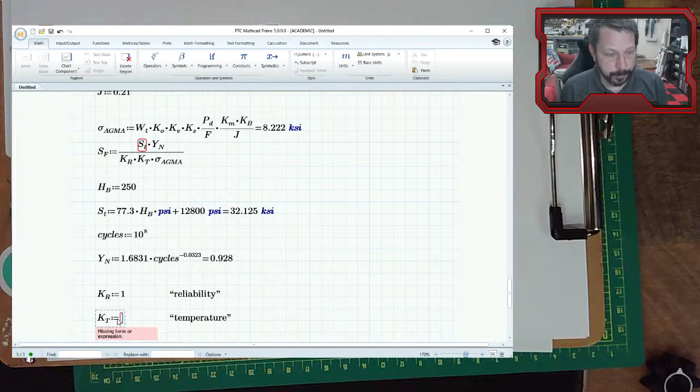And at that point, we have all of the terms in here, I believe. Yes. And we end up with our factor of safety of 3.6. So we have plenty of factor of safety.

We probably could have told, you know, even though this 8 KSI doesn't directly relate to a material strength that you would normally look up in a book, it still is similar enough that you can be pretty confident that 8 KSI is not going to hurt any kind of metal that we're going to deal with. But to be sure, you compare it to the AGMA corrected strength. And sure enough, we have a factor of safety of 3.6.

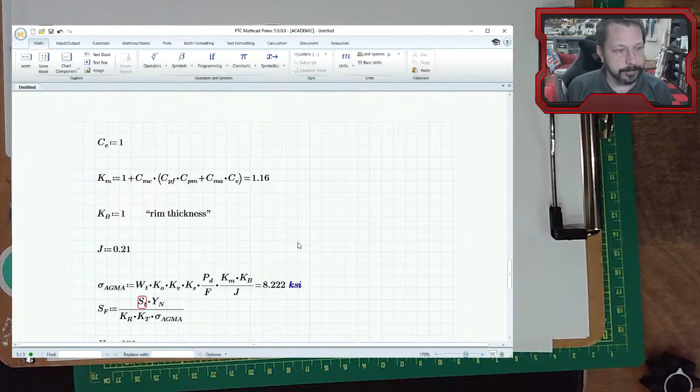All right, next time we will get to do a similar thing, but with the contact stresses. It'll be much faster because we get to reuse a lot of these terms. We create a couple of new ones, but a lot of them get reused. So I'll post this Mathcad sheet on Moodle, so you can go through it and look through it if you want to.